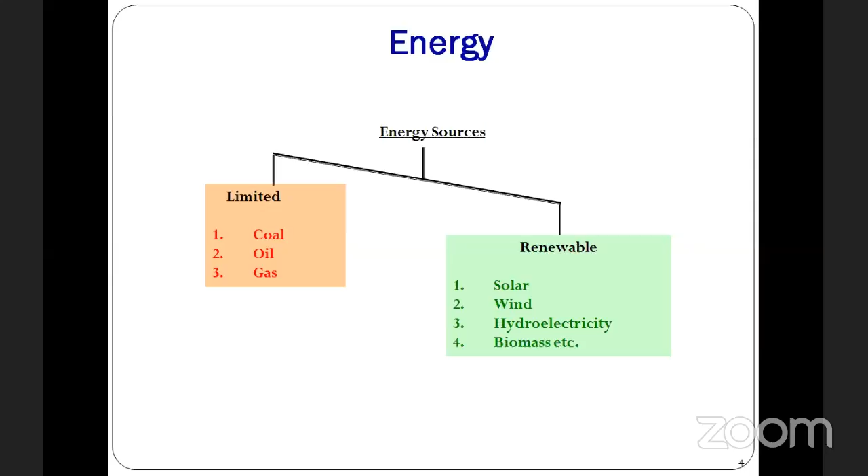So integration into the grid is very difficult in case of renewable energy. However, we have technologies we are adapting, that is different. But coal, oil, or gas is very important and very easy to integrate with the power grid. Okay, so those are the two types of energies, renewable energy and non-renewable energy. Next we'll go.

You can see the sources of energy, renewable and non-renewable. Renewable is solar, wind, biomass, and water. Water is from your hydropower, and geothermal, wave energy. Today we have tidal power and all. The wave concept is another technology. We have all these things from natural resources. Renew means new. So what is renew?

You take that word renew. Newly, it will be the power. The wind comes now. Again, the next time the wind is not the same wind. It will be different. The solar is coming here. Again, the solar is different solar. So the solar insolation is different. So the wind power, wind speed is different. Every time you're not getting the constant.

So renew, new power. And from the source that is easily available is renewable energy. And from the waste, like a biomass and all, from the waste product, the byproduct, we are producing the power. It's called renewable power. So from the biomass also we can get this renewable energy.

Okay. So this is renewable. Non-renewable is coal. Coal means lignite coal, bituminous coal, anthracite coal, like that we have studied. So with this coal, like lignite coal or bituminous, semi-bituminous coal, we are producing the power, particularly from the thermal power station. Okay. So that is a coal-fired power station.

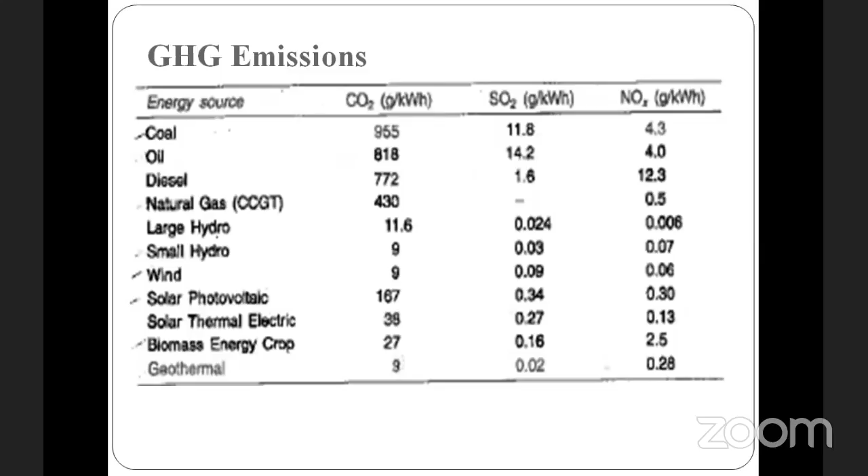So we have a lot of renewable energy. This renewable energy contribution is very important at this particular stage to reduce greenhouse gases. The greenhouse gas emissions are reduced due to this contribution of renewable energy. Okay. So it is evident from the table that the renewable energy sources make little contribution to CO2. So that's what I said: renewable energy has a lower contribution of greenhouse gases. That's why we are moving to and contributing to renewable energy.

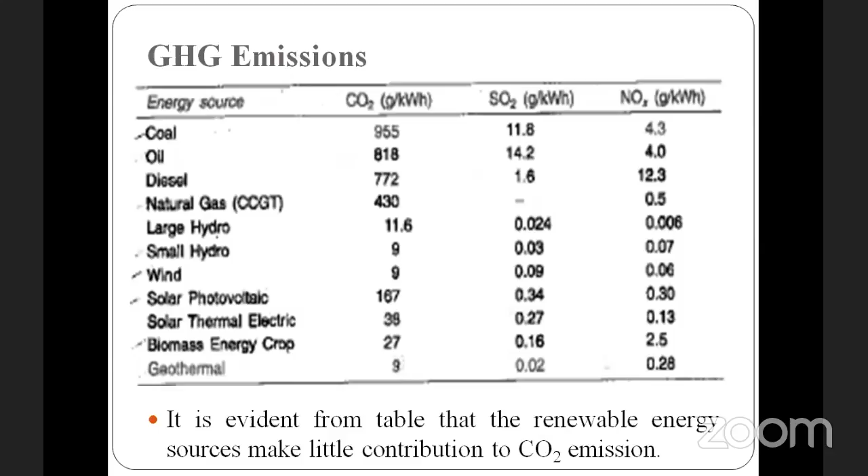Not only this, the government of India has fixed the target for renewable energy of 175 gigawatts by the year 2022. That means up to the year 2022, we have to reach the target of 175 gigawatts. Giga is kilo, mega, giga, 10 to the power 9. So that much, 175 gigawatts of power, only from renewable energy, like wind and solar, because the contribution should be there to avoid these greenhouse gases. Okay.

So what happens ultimately? Everyone's contribution to save the earth. Already a lot of issues we are facing with the earth. So this we should not face in future, which means that everyone should contribute to the earth, particularly in global warming.

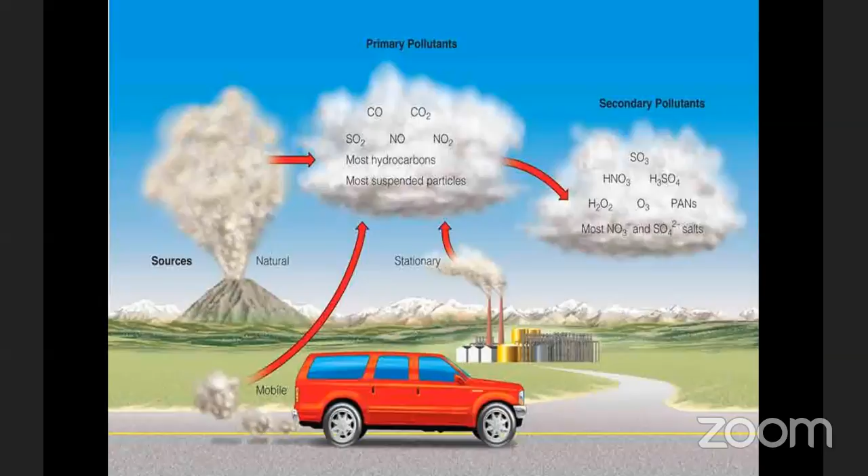And the secondary pollutant is dangerous, which is nothing but acid, HNO3, H2SO4, sulfuric acid, all those things. So this is the danger, which is the effects due to acid rain. Okay, so this is the major thing.

Okay, solar. So solar energy. We have an abundance of solar power. Out of 365 days in a year, 300 days we will get solar power in India. Particularly, I'm talking about India. In some other countries it's different, but India is blessed; the solar potential is very high in India, we all know.

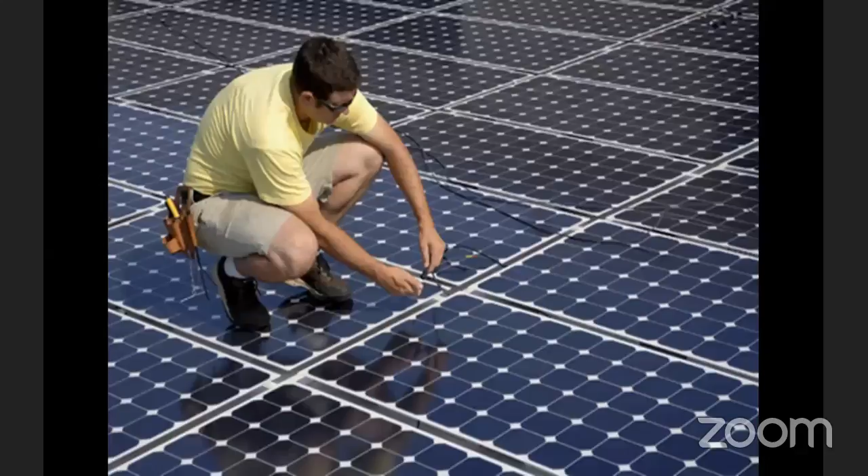So you see, this is solar, the panels from the PV cells. We are getting the power. How we are getting solar is because of the sunlight. Sunlight is radiation, solar radiation. So there are two types basically: direct sunlight and diffuse sunlight. Direct sunlight is directly from the sun to the surface. So this is called direct beam, direct sunlight.

Diffuse sunlight means the sunlight which is not in the line of sight. It falls on the mountains, on the buildings, on the trees, and then we are getting that solar energy. It's called diffuse sunlight. The difference is that with direct solar radiation, the efficiency will be very high, whereas with diffuse sunlight, the efficiency of the PV panel is low compared to the direct beam.

Particularly, the high insolation area in India is the Kashmir, Ladakh area, the Ladakh, Kargil sites, where we have a very good solar potential and the radiation is very good.

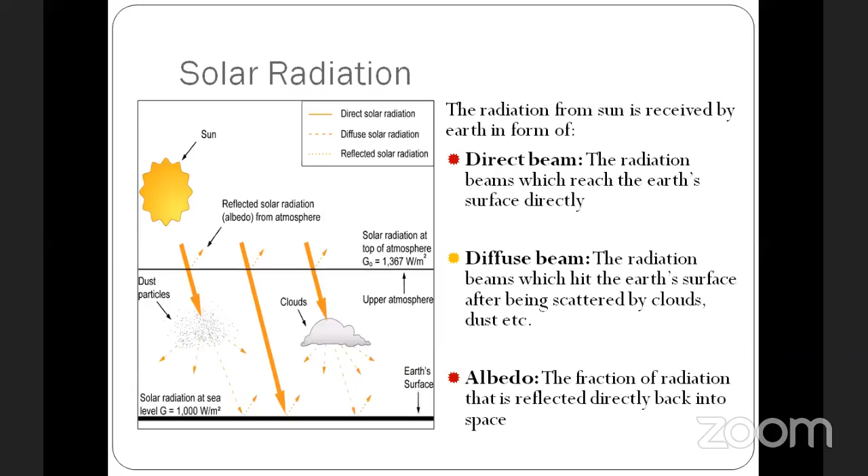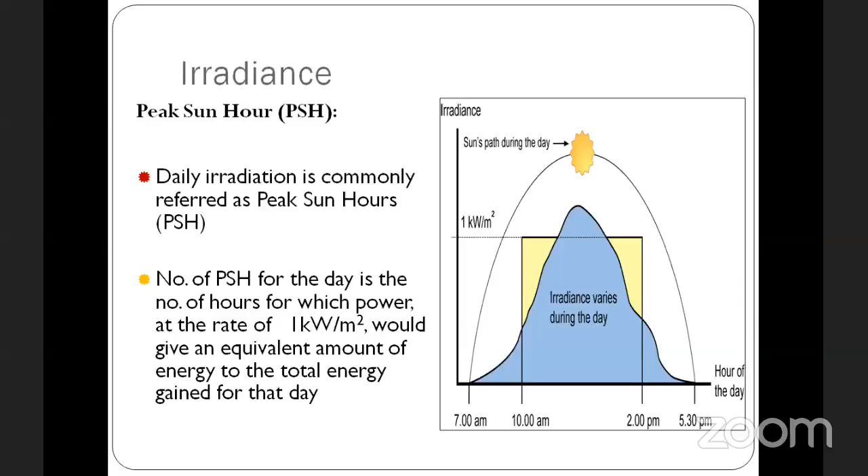I'm talking about India because India has very good solar potential. This is different from one country to another. If it is Algeria, that is different. If it is New Zealand, that is different. If it is the UK, that is different. But India is a very good tropical region where we have very good peak sunshine hours. So we have an abundance of wind power and solar power. So this is what we learn, and how solar power is produced.

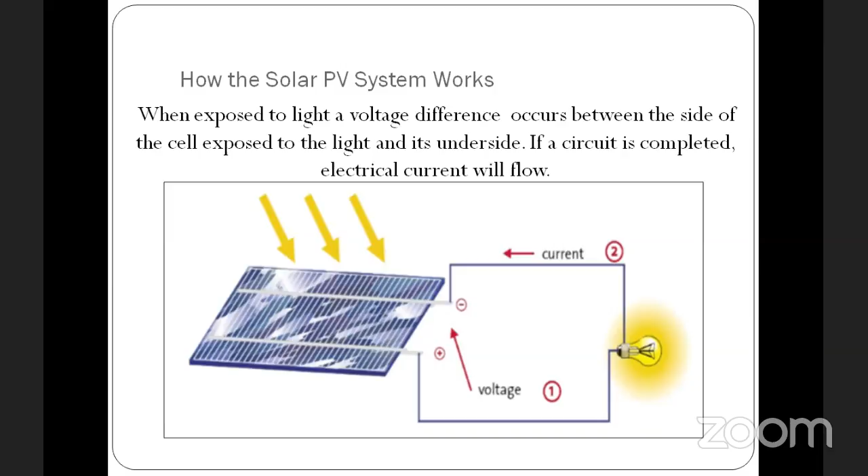Today we have this PV panel. From the PV panel, the solar radiation is collected, and you have the positive and negative. When exposed to light, a potential difference, a voltage difference, occurs, and due to this light, electrical flow happens. So, as I said, energy converts from one form to another. Light energy is converted to electrical energy in the case of solar. So this is what is happening in solar: conversion of one form to another form. Okay.

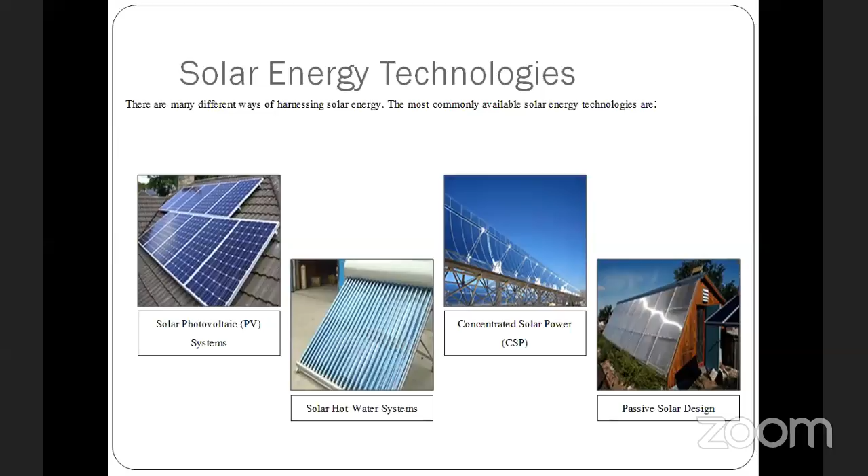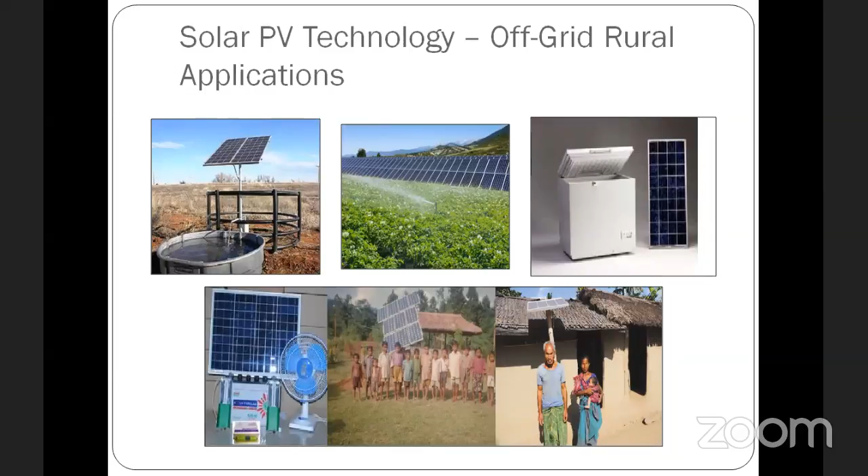And these are some of the applications of solar: off-grid rural application. You can see in the rural areas, the government of India and the state governments are promoting solar. So here you have solar power in farms, particularly to promote agriculture, in schools, in small houses on the rural side; you can see this even now. A lot of projects are going on tremendously. So this is off-grid solar application.

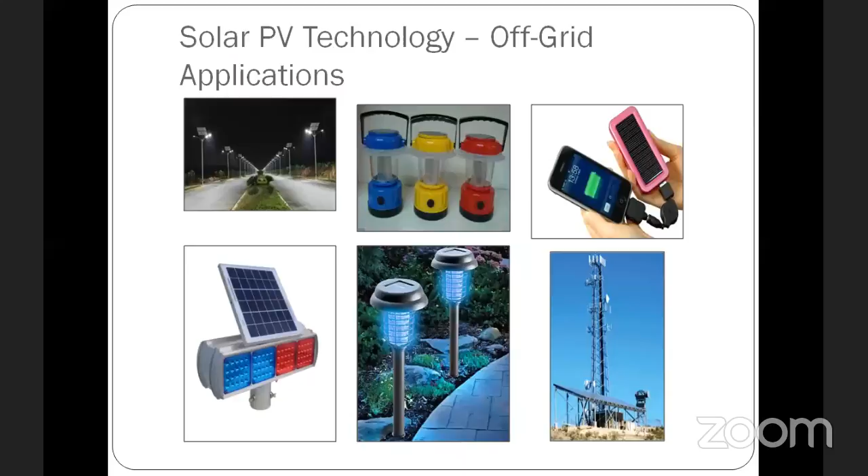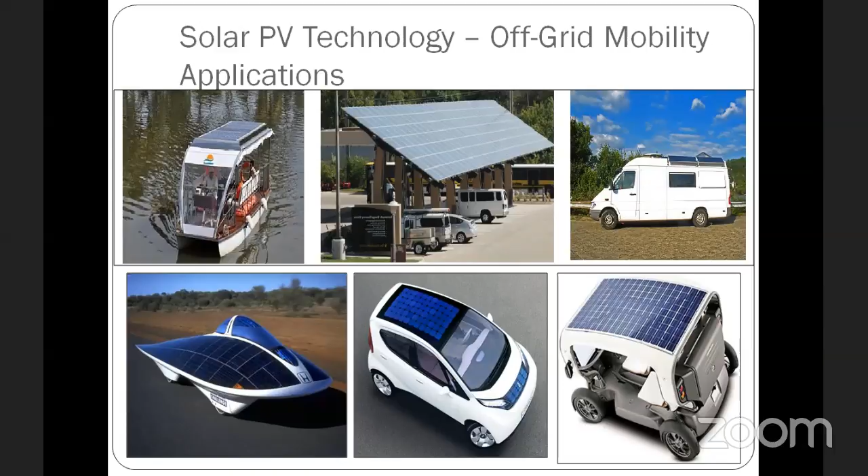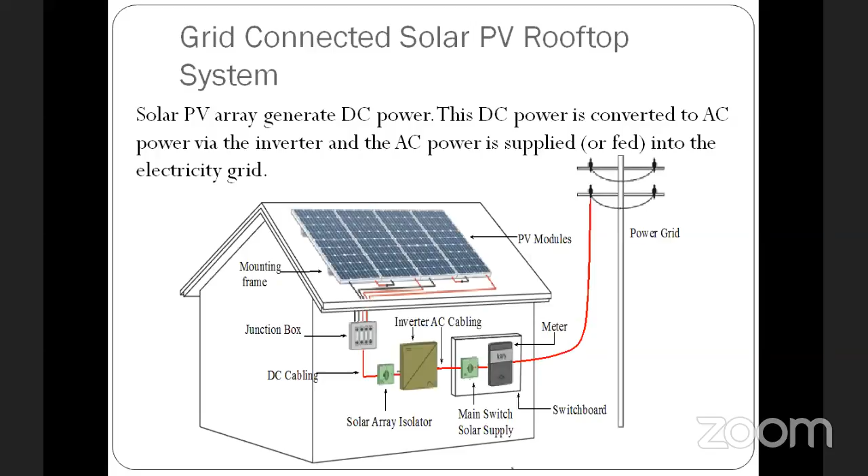Clear? So this DC power is converted to AC power by means of an inverter, and you are utilizing it, and this AC power we are giving to the electricity grid. Okay. So this is PV solar. Okay.

And we have a lot of project schemes, like the Chief Minister solar power scheme. You can see in houses in the rural side, green houses is what we call them. In most of the villages, there are solar powered villages, solar powered houses. So that is the Chief Minister Solar Powered Green House scheme. So a lot of schemes are there in government. They are giving subsidy for this.

Another one is the Solar Powered Green House scheme for weavers. The same thing as the Chief Minister scheme, but especially for the weavers, to promote the weavers and the power loom industries. So we are giving subsidy. The weavers are also very important. So these are some of the schemes.

And apart from that, we have a solar village in Irumbai village, that is in Villupuram. The village itself is totally powered by solar. The project is going on. And solar irrigation pumps to the farmers, to promote agriculture, the solar powered irrigation pumps for the farmers. So these are some of the solar project schemes.

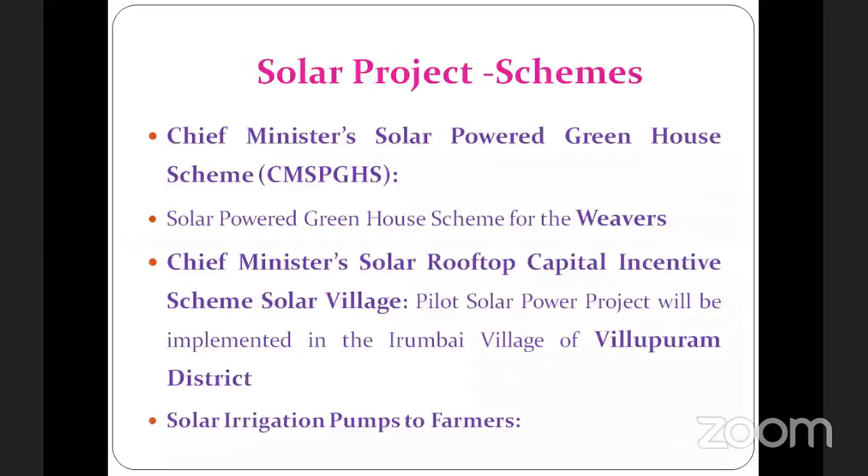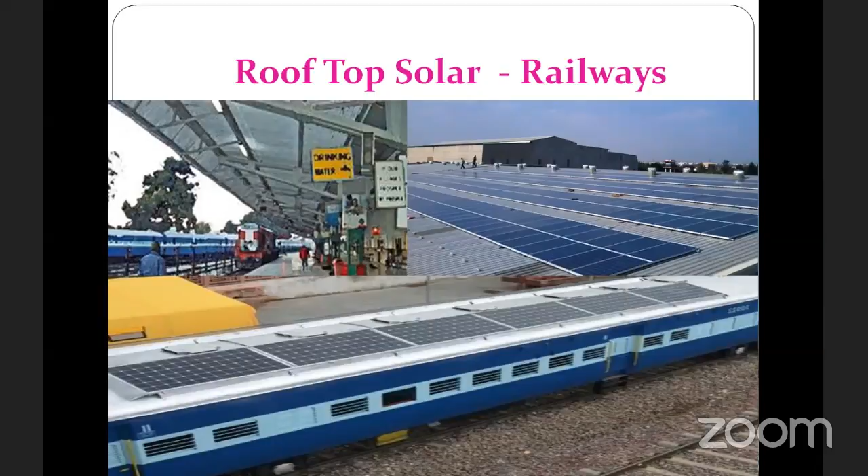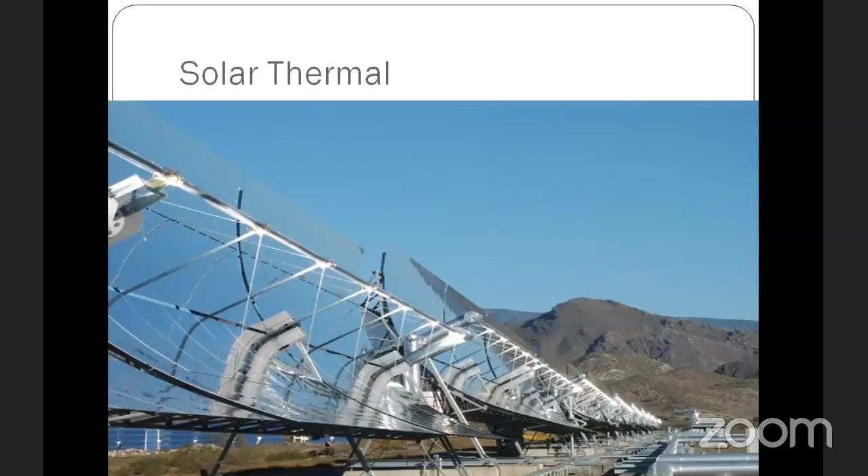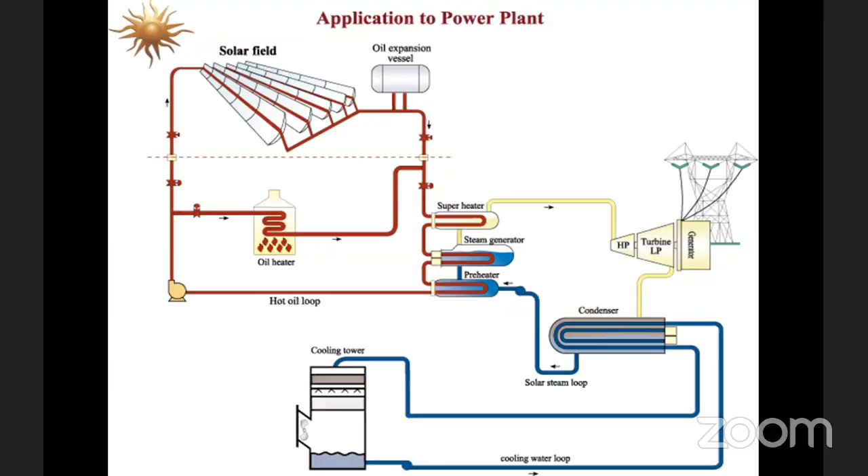Okay, so this is a 1 megawatt solar thermal power plant. So you can see this solar thermal power.

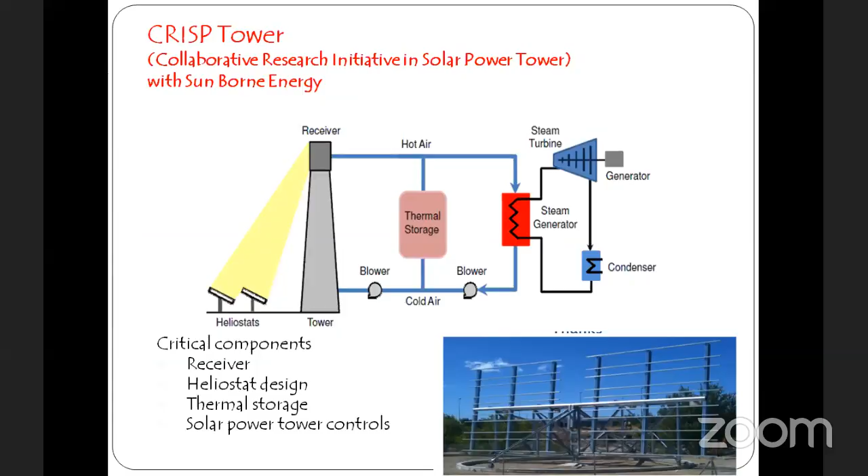But as far as India is concerned, this is very few. Solar thermal is very few, but in most of the countries, European countries and other countries abroad, solar thermal power is very high. Okay, so this is about solar. And next we'll move on to wind.

So wind is very important here because in India we have abundant power. We have very good growth. As far as Tamil Nadu is concerned, there are two predominant states which have a high wind power potential, and Tamil Nadu has the highest capacity. You can see this. We have passes. We have potential in these areas: Tirunelveli, Kambam, Coimbatore, Kanyakumari. In these areas, we have a high wind power potential.

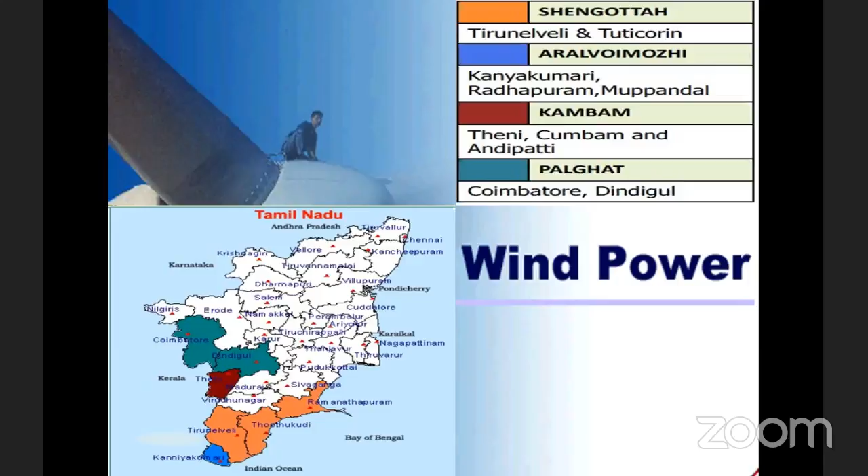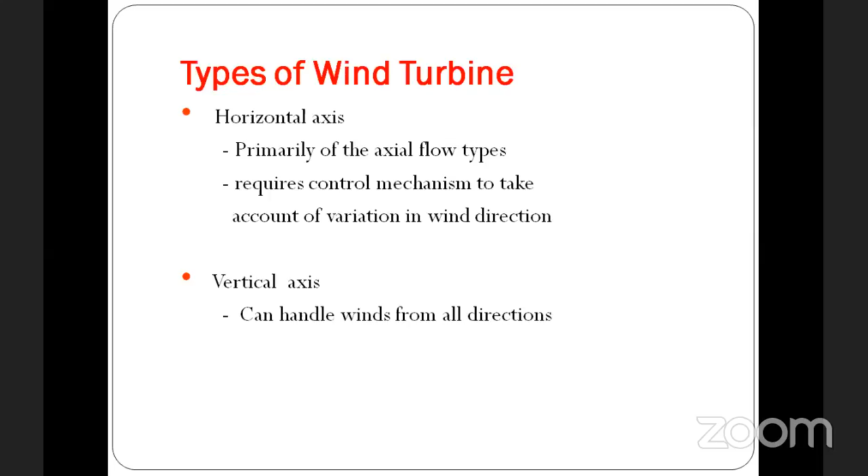So there are two types of wind turbines. One is horizontal axis, another one is vertical axis. The horizontal axis is primarily of axial flow type and requires a control mechanism to take account of variation in wind direction. Vertical axis can handle wind from all directions. So we have two types. You can see the vertical axis and horizontal axis. In horizontal axis, you have two-bladed wind turbines also. So these are the wind turbines we have.

And this is another type of wind turbine. You have a vertical axis. You have a lot of these models still in Tirunelveli; I have seen this. You can see the Savonius type, the older one, and Darrieus type. The model wind turbine is still there in Tamil Nadu itself. This one is horizontal axis turbine and vertical axis turbine. So this vertical one is Darrieus type. You can see this Darrieus turbine.

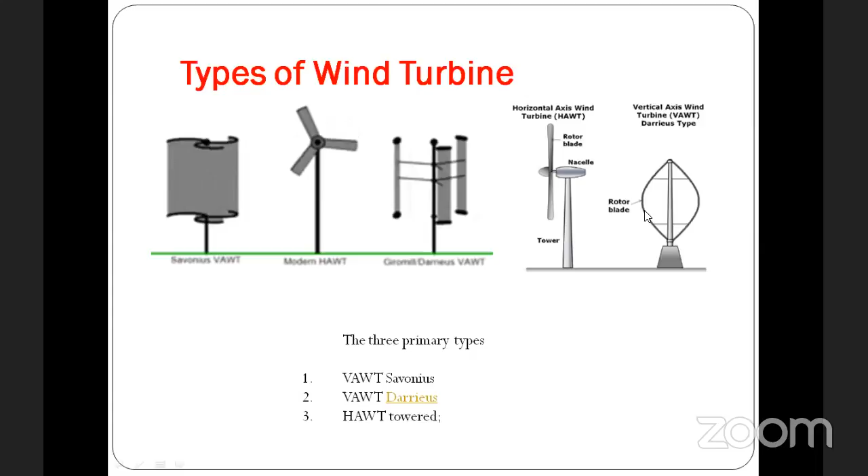And how does the wind turbine rotate? Both wind and sun, the energy is coming from the sunlight actually. From the sunlight only we are getting the wind, because the cycles form during the day; the sunlight converts, and you are getting the humidity. So wind is blowing because of the sun only. So you have wind power only because of the sun.

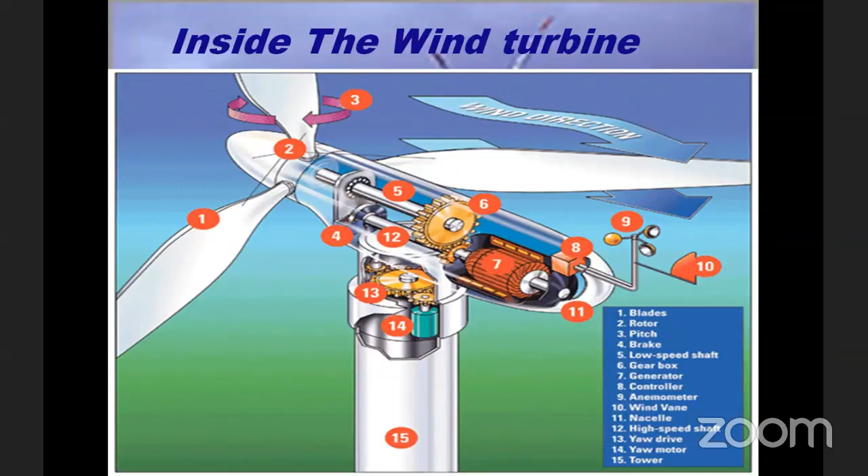So this is isolated grid, and central grid is 200 kilowatt to 2 megawatt. Even now we have 2.5 megawatt, more than that, wind generators also. So this is connected to the grid, central grid. You have like farms, so you have more number of wind turbines.

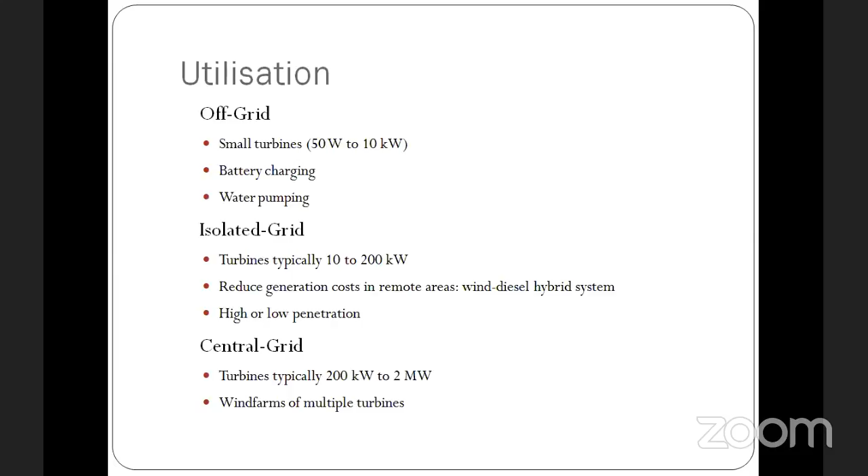So the advantage of offshore over onshore is in offshore you will get high wind power. Why? Because in case of onshore, the capacity, as I said earlier, is 200 kilowatt to 2 megawatt or 2.5 megawatt, as the technology improves. But when you go for offshore, normally 8 megawatt or 10 megawatt, even up to 14 is there. I'm talking about a single machine: 2 megawatt in onshore, while in offshore you have 10 or 14 megawatt, means high wind power you'll get.

And what you call wind power density. Wind power density is a very important factor for the output of wind power. This wind power density is very high in the sea, particularly when compared to the plains. So that is the difference between onshore and offshore. In offshore, you have high wind power density, so that you will get more wind power.

So the speed is also more, and the turbulence. Turbulence means the vibration. The vibration is very less in case of the sea, whereas in case of plains you will get more turbulence. So these are some of the differences between onshore and offshore, and noise is less in case of offshore. These are some of the advantages, and the projects are already in foreign countries. In India, the project has started, slowly it is going on.

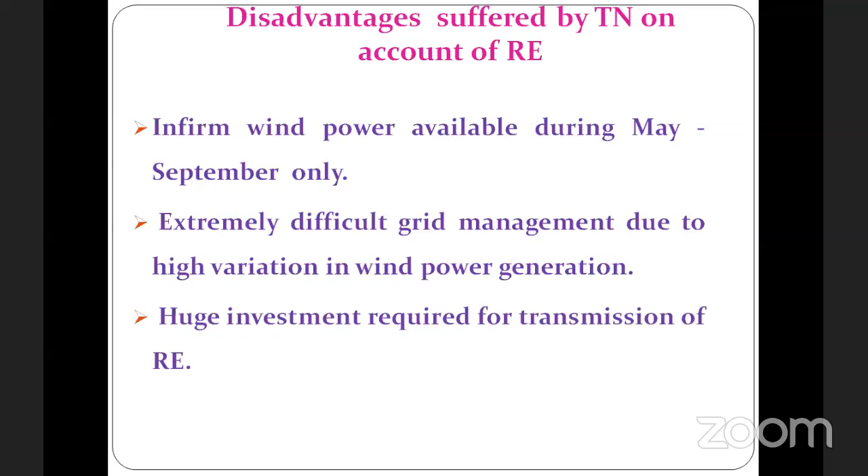And biopower, biomass. Biomass is organic material made from plants or animals, any waste product, for example vegetable waste. For example, the Coimbatore market: every day tons and tons of vegetable waste are collected, and from that we are producing power. We have a 250 kilowatt biogas plant there in Coimbatore. From the tons of waste vegetables every day, we are producing power as biomass.

And not only from plants, animals also, like poultry waste or cow dung. The cow dung is crushed into liquid form and put into a closed tank. The fermentation process takes place, and from that gas is produced. In rural areas you can use that gas for cooking, and you can also convert it into electricity. However, mostly we are using it directly as gas. So from organic material of plants and animals, we get power as biomass.